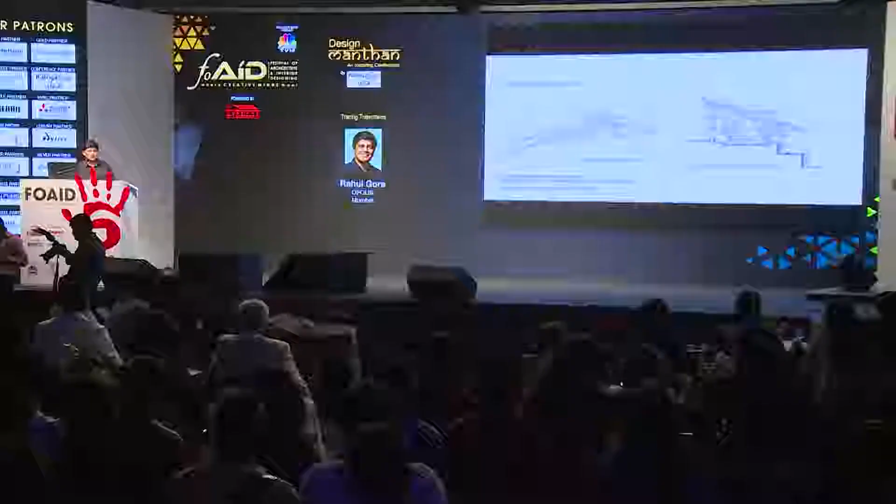So through the process of drawing, and these were hand drawings, ink on tracing, I measured through 4 houses. I learned to look at architecture and tried to analyze a building as to why it made me feel in a certain way. Nari Gandhi had already passed away, so in a way it was just his architecture talking to me, and I think that's a very interesting way to study buildings, just through the medium of drawing, experiencing them, and trying to analyze and feel them.

But sometimes the exact opposite has happened. Again, in Europe in '93, I happened to visit Frank Gehry's Vitra Design Museum at Weil am Rhein, and it made me literally run out. I don't know why, but it was within minutes. I didn't feel comfortable in that space.

That feeling of - there was an exhibition on African chairs, maybe there was yellow tinted light coming in. But what it was, I mean, it's a very analytical way of looking, and certain spaces do make you feel some way. So I think we've looked at architecture critically in the past. I'm very concerned with what makes you react in a certain way.

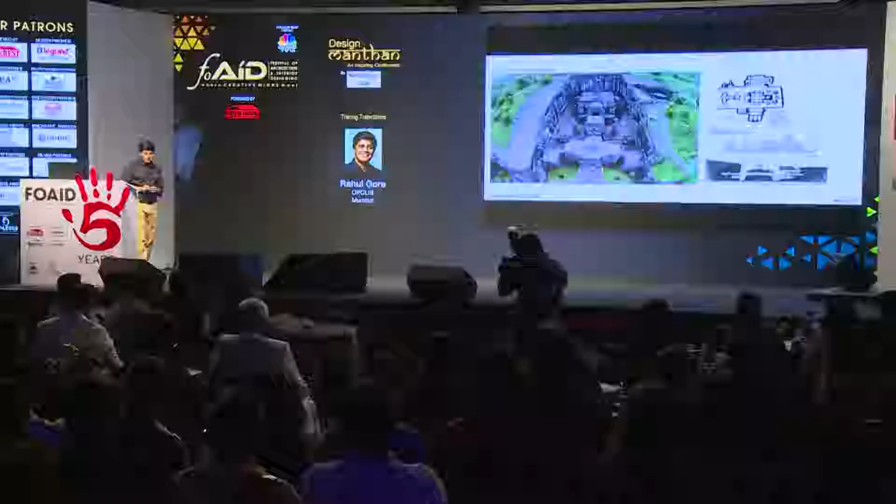I think historical places are always a super treat, especially one sees the way light and climate were treated by our predecessors. Or the sheer marvel of the Kailasha temple, to imagine that something from top down can be made into a positive architecture - to even think of a conception of having a form or a shape ready and start sculpting it downwards.

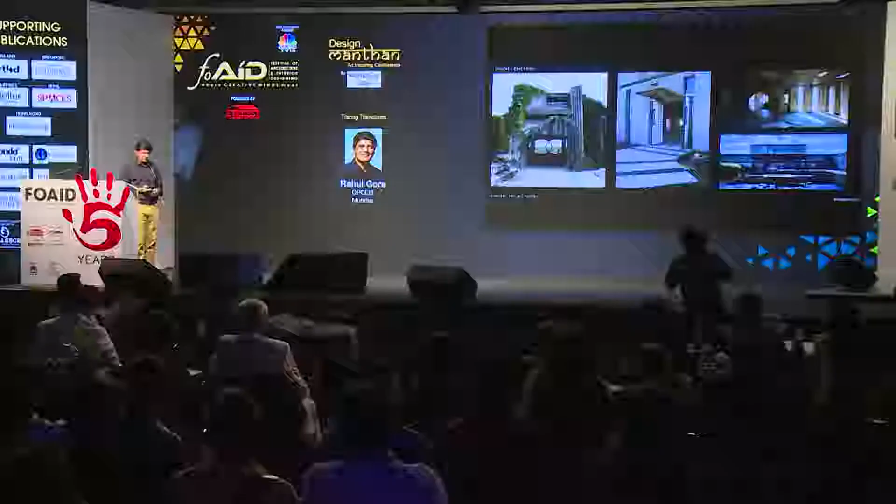Now, contemporary architecture buildings is also very important to look at, and we all have our heroes. The Brion Cemetery by Carlo Scarpa was simply mind-blowing for its kind of articulation of scale, geometry, texture, and right from the concept to the execution to the minutest detail.

Or La Tourette, where it's simply the creative genius of the man that was Le Corbusier. I think it's a building that really speaks, and you try and wonder what makes you feel that way.

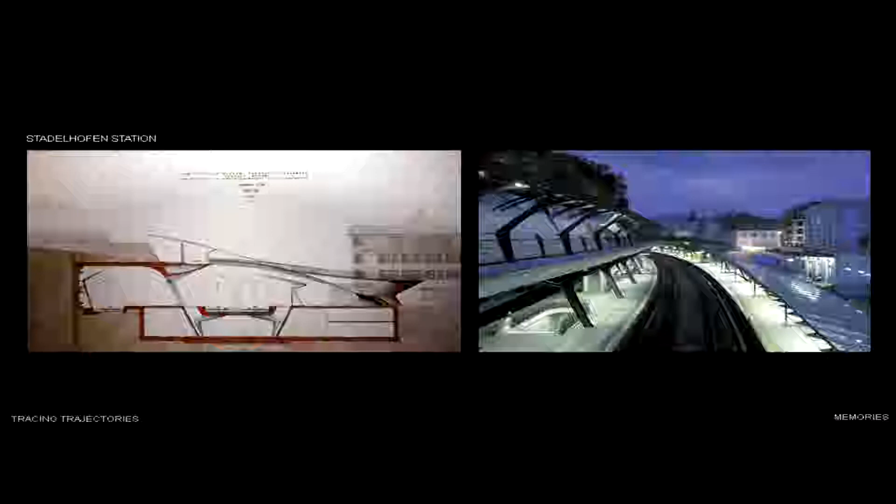At the urban scale, there is the Stadelhofen station by Calatrava, which very seamlessly integrates the urban fabric within the city. You don't know where the street begins, where the station ends - it's kind of woven one into the other, with very old architecture and new architecture marrying each other very well.

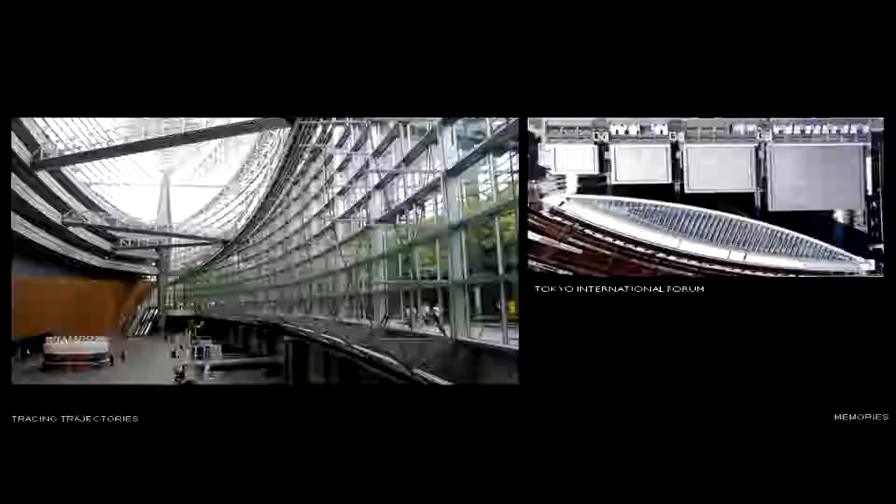The Tokyo International Forum by Viñoly in Tokyo, again a very complex program, large program, but integrating it seamlessly into urban spaces within the city fabric.

These are exciting projects. Or a very simple building, amongst my favorites, is a simple pavilion by Yoshio Taniguchi, where the only program is to go there and view. There is an awesome view of the sea and a park on one side, and this building essentially becomes a bridge between the two. So I think it's amazing how a non-program building was made into an event.

Or for the simple materiality and quality of light that Maki's architecture in Nakatsu has explored.

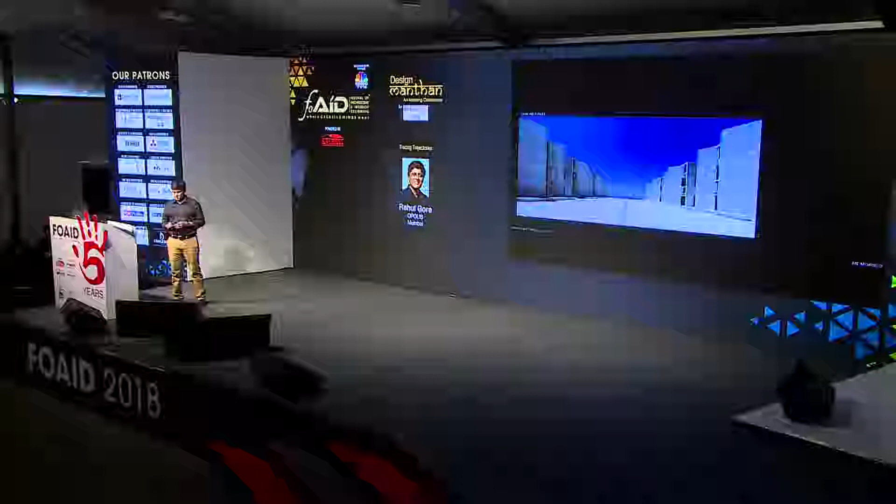Or the Salk Plaza, which I think has this timeless quality of space one can only dream and aspire to achieve. But on a recent visit, I also had a chance to stay at the India International Center in Delhi by Stein, and I think the proportions of this courtyard were brilliant.

So I think that study of spaces, right down every time we are visiting and experiencing it, it's very important to analyze, make a quick sketch, and see what makes you feel or why you like a certain thing.

So with this analytical mind and thoughts, Sonal, my partner and wife, we set up to do our studio, and we wanted to lay down certain guidelines that would help us navigate our future. So we laid down principles that were relevant to our studio and to our practice.

I don't expect you to read this, but essentially we want the studio to be a good place to work, learn, and grow, both for the people who work in the office and for ourselves. So that's the metaphor for the office as a family, and I think everybody can relate to what a family should offer. That's essentially how we like to see a studio.

So we get asked very often why we chose Opolis. I think the 'O' comes from our experiences in Japan, where 'O' is given as a sign of respect — they say cha is tea, but they'll always say ocha, or mizu is water, and it's always referred to as omizu. So 'polis' is city, and 'O' is for the respect. It's a practice about the city, and we also have an underscore to keep it open-ended.

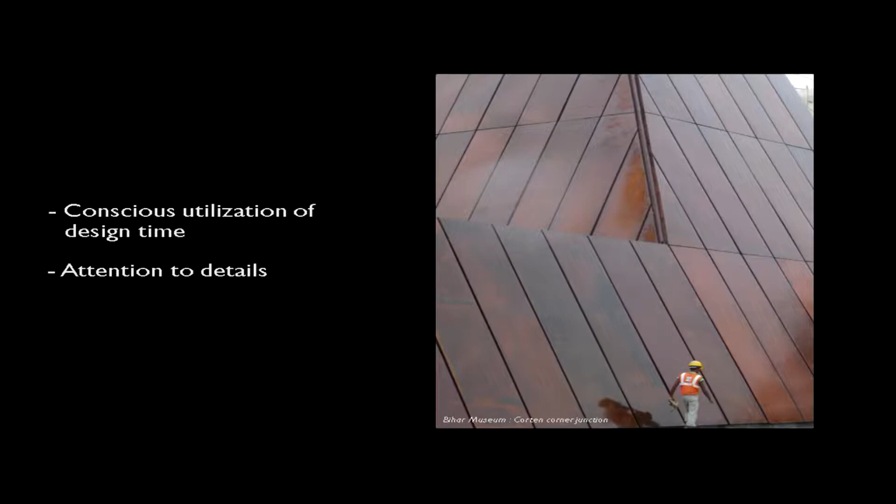But this going slow does not mean infinite time. In fact, we work very structured. What we ensure is to give attention to detail. It's similar to driving, what you observe when you're in a car, on a cycle rickshaw, or walking. The speed you move at helps you see different things. Similarly, the speed at which you design, especially in the initial design phase, is very important. So we set time, but make sure that time is well utilized.

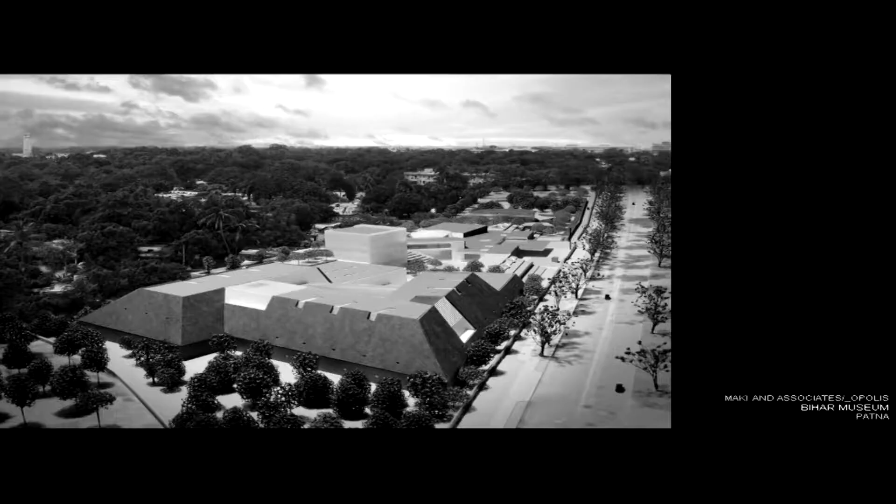With this, I'd like to look at the Bihar Museum project, which we won in an international competition along with Maki and Associates from Tokyo. The others were Norman Foster, Coop Himmelblau, Sanaa, and Libeskind, along with Indian partners participating in the competition. So this took me back.

I worked in Maki's office in 1998, and we had this opportunity to collaborate several years later. More importantly, the lead architects on the project were colleagues of mine. We used to sit together in the same room working. I had moved on to do my master's and set up my practice, while they continued working at Maki and Associates. So it was a wonderful collaboration to work together again 18 years later. I think that's very key, because in any collaboration, trust is the primary factor, and I think we've succeeded in completing this project primarily due to that.

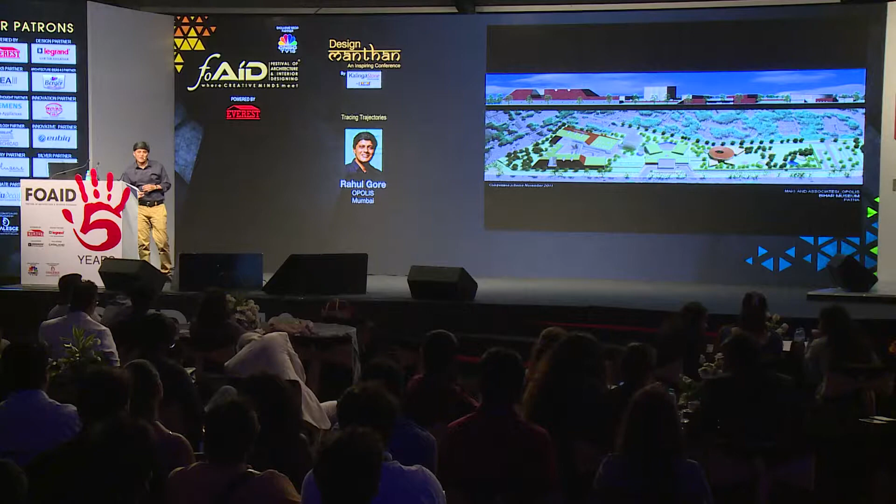So that's the Bihar Museum sitting in Patna city with the Ganges River behind. It sits on a 13.5-acre plot, with 250,000 square feet of built-up area. The building is 300 meters long, and the site was half a kilometer long.

I think the important part here was Maki's idea of collective form, which he's been exploring for the last 25 years, especially in the district of Daikanyama in Tokyo. I see this project as a continuation of that idea, where we looked at a collection of buildings, not an iconic building, to make it really integral to the city of Patna. So at the urban design level it was very important. But you have to tie all these buildings together, and that's where the material aspect came in. We used corten steel as a symbolic material, not only because it represents the rich past Bihar had in metallurgy, but also because it helped unify all the buildings along the street side.

The widest part of the site was there, and that's where the maximum program was fitted in. The entrance was kept away from the two main nodes, with the children's gallery on one side and parking beyond.

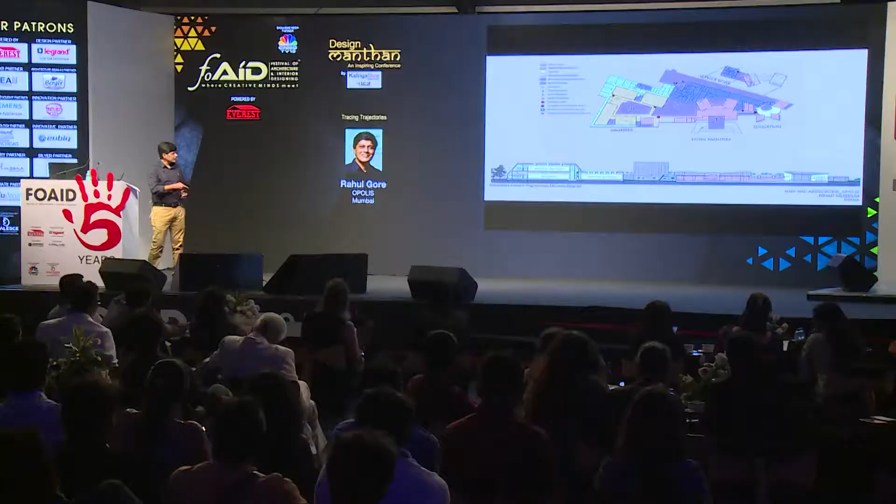It's largely a ground-plus-one structure, with only the administration tower rising to 4 stories. The galleries were on one side, and there was the entrance area, which was more bi-directional, taking people in and receiving and dispersing them. The Children's Museum on the right-hand side was more extroverted, connecting to the landscape. In section, you'll see it's mainly a ground-plus-one structure, with only the admin tower having 4 floors; otherwise it's primarily a completely ground floor structure.

The entrance is quite symmetric, in the nature of an entrance. It needs to receive people, calm them down, be at a correct scale, and let people disperse wherever they want to go. They need some information before they can move around.

This was the entrance area, the canopy, which was around 25 meters by 25 meters. It had enough space, with an idea of a group entrance where children and people coming in larger buses could get off and queue up a little if needed. There was a covered walkway letting people queue up if they came in a big group, and this was the main entrance to the museum.

And then, so the large crowds—sorry, I'm getting ahead of myself.

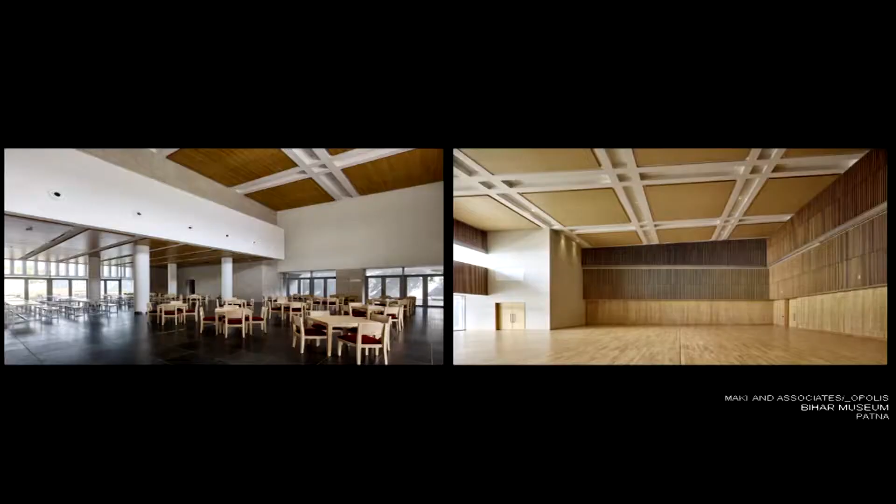Oops, this monitor and that monitor are showing different, huh? Yeah, now they're showing okay.

Sorry, so for large crowds, I think the scale of these reception areas is very important. There are sometimes small groups coming in. On a weekday, there are hardly 10 or 15 people hanging around, but on a weekend, suddenly there are thousands of people coming. So how does one design these lobbies to be sensitive to both scales, without people feeling either too crowded or too alone in that space? Those were important aspects.

These are the two large span spaces that are on either side of the reception lobby, with a cafe on one side and the multi-purpose hall. These are like 25 meters by 25 meter spaces again.

This is a view of the main reception, then looking towards the right, towards the children's gallery, where one moves ahead and sees a courtyard with terracotta, a new material introduced primarily to give the children a special character.

Then the children's museum itself is this large drum. This is the exhibition designed by Lord Cultural Resources, not by us, but these were actually replicas, and you could touch and feel them. So the kids had a lot of interactive display spaces.

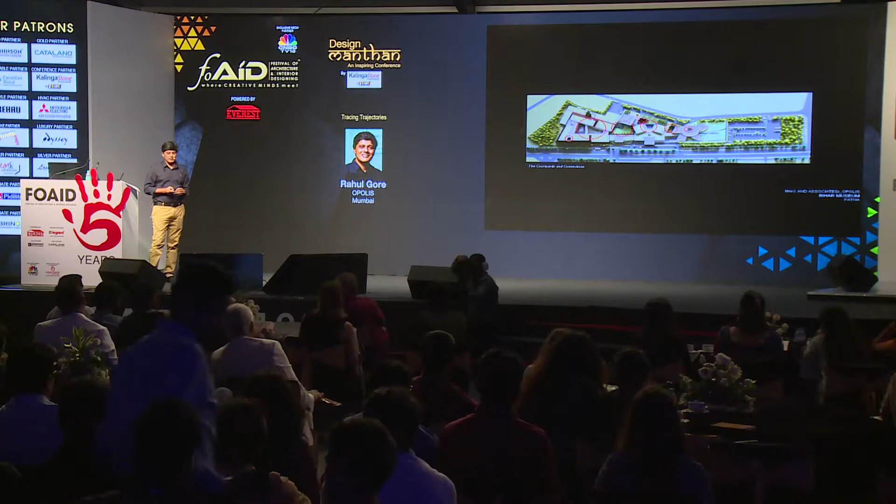What's unique in this building, I think, is it's got 7 courtyards, and I already showed you 2 which were in the children's gallery. There are 5 other courtyards, all of varying scales and materials, each having a particular function.

This one's the cafeteria courtyard, and it has an amphitheater. The administration tower overlooks the courtyard.

Or the exhibition courtyard, which is completely white—it has white gravel. It's meant for exhibitions, but more importantly, for sound quality, because Patna is a very noisy city. We've used the building masses here, the scale, to make the space really quiet, ideal for exhibitions.

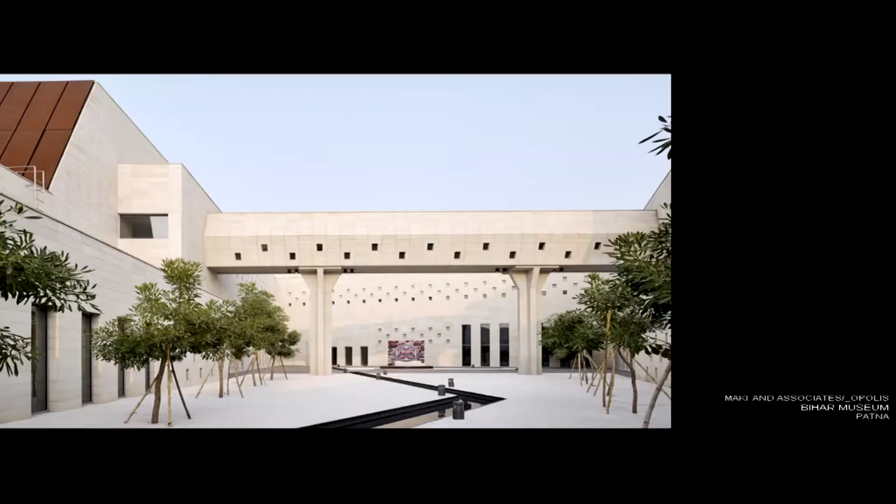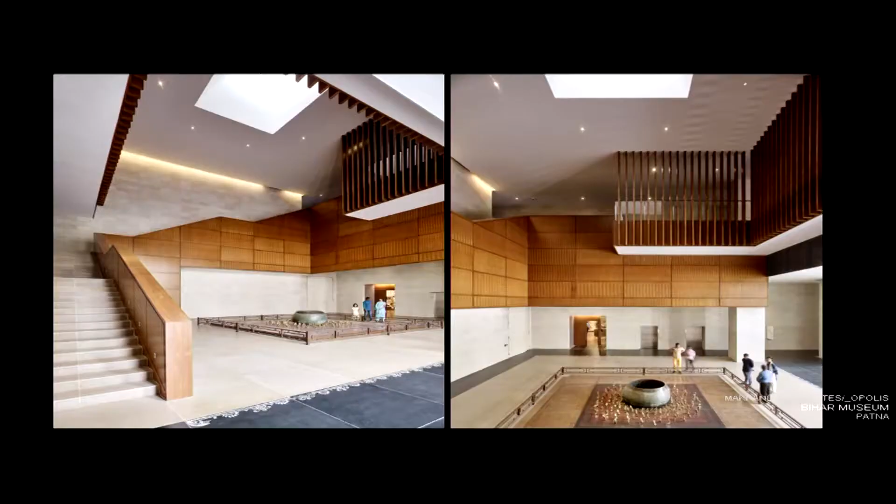There's another view of that same space, and you see a bridge that connects the exhibition sequence at the first floor level. Within this exhibition sequence, you have a lounge space where we've introduced the material teak. It's a triple volume space with a skylight where one can move up the staircase, but it also creates a pause—it has washrooms and other areas where one can relax.

So the galleries themselves are these black boxes, large spaces spanning 20 meters by 60 meters—some of them are 20 by 80. And as you're moving through these, I think you lose sense of time.

So what we've done consciously is create these cloisters with a lot of natural light coming in, and daylight becomes a good reference at every point, to make sure one is not disoriented when moving through these black boxes. These are the cloisters, the passages at the upper level, with the image on the right showing the bridge.

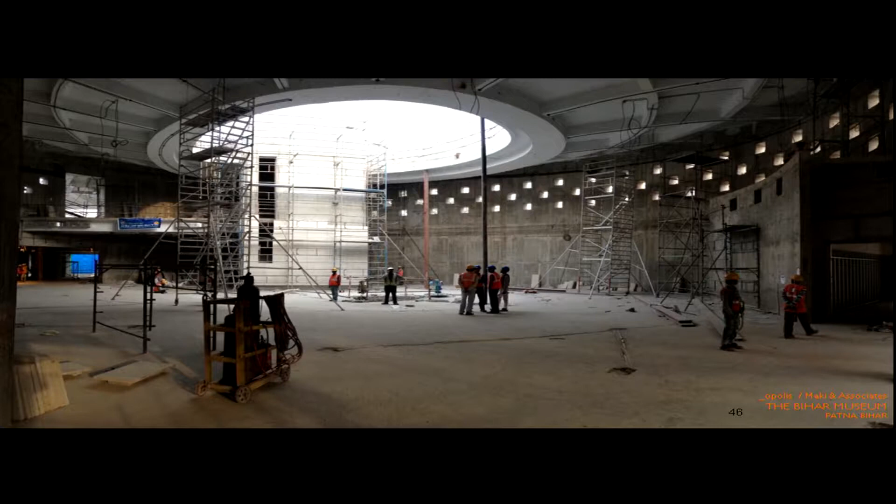But I think the most exciting part of this was seeing the construction activity. This is a 35-meter large span space designed by Mahendra Raj as a structural consultant. It's basically got 600mm thick RCC walls with a concrete ceiling, a slab with an elliptical cutout in the center—so it's columnless and it's 35 meters.

I think during the process of construction, that was, for us as a younger practice, a great learning experience. We had 4 people from our office based in Patna reporting directly to me in Bombay and to our team in Tokyo. So a lot of our personal time, including mine, almost a week every month for 3.5 years in Patna. And it's not an easy city to live in, so that was the real challenge—keeping people motivated and happy in Patna.

So from here I'll just change scales and look at a house that was happening almost in parallel with the museum. This is just 1,600 square feet of built up area, located in Khandala. What's unique about Khandala is that it sits on top of the Western Ghats, and that's Mumbai there.

The entire rain is kind of deposited there. The first onslaught of the southwest monsoon is taken by Khandala. If a house is not built well with a good roof, it definitely leaks. I've not seen a single house in Khandala which does not leak.

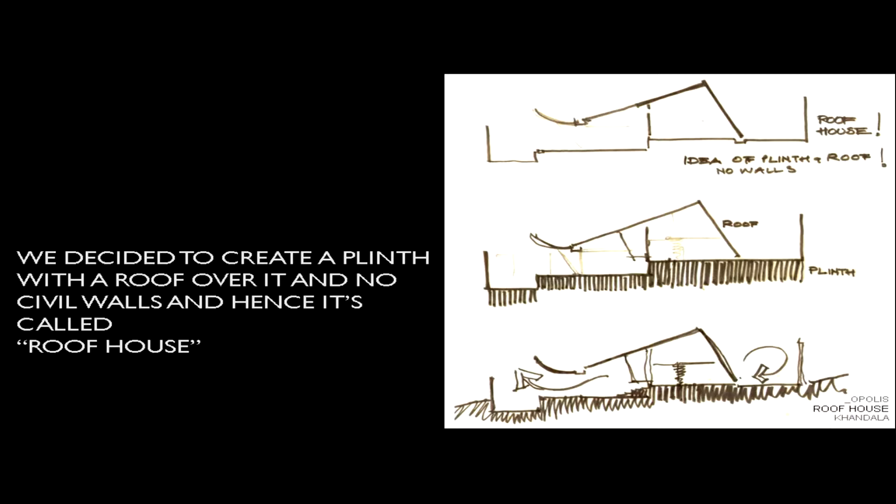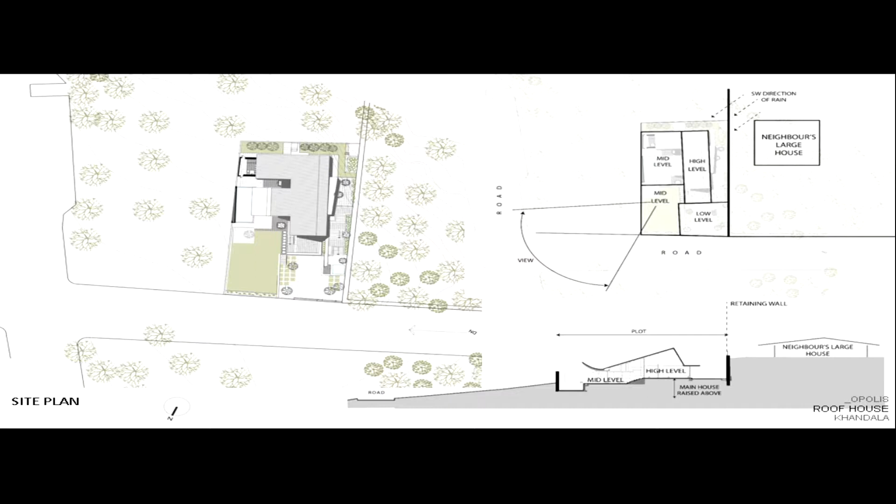So I think that was at the back of our mind, and we decided to try and do a house where the plot was quite small, just 10,000 square feet. So we did a house with just plinths and a roof, and said let's not have any walls, because if rain comes at an angle, walls start leaking as well. This is the plan where the rain direction is seen in the southwest direction, and there was a roof that leaned into the rain and took the main onslaught of the monsoon.

This place was for a very young family, a young couple with young kids, and using the natural levels of the site to make it as playful as possible was the key concern. So there's an outdoor living room which is basically open, with movable furniture on wheels that can be carted away and put inside a plinth, so that the house is only 1,600 square feet. This is one of those examples of building less.

Because of the rain, we had to deal with how it drained off the site, and we decided to make that into some kind of an element. This is a view. The image on the right shows how the roof itself became the wall, and on the left it shows how the roof made space, but because of the levels, one could open up a little bit on that side.

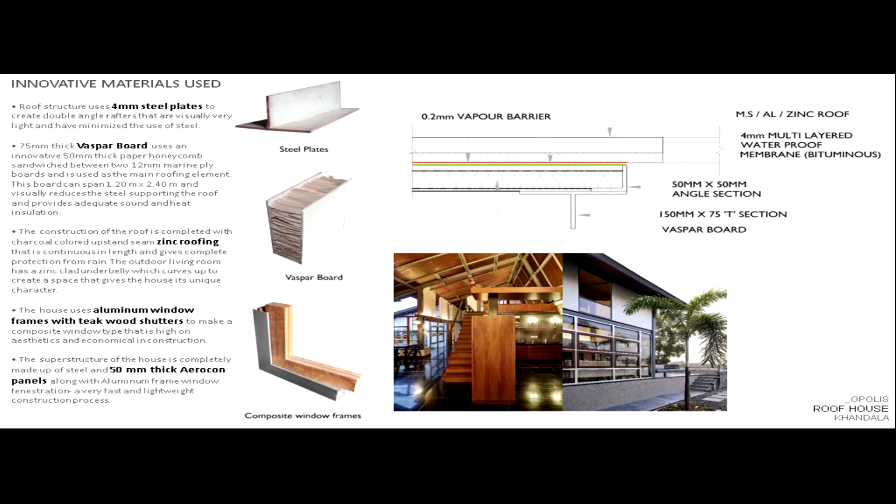I think the key innovations we looked at in this project, there were several, one was to use 4mm steel plates to build up a section instead of standard sections. This lets steel be used as steel, designing the member around that 4mm thickness so it can be used very economically. Huge credit goes to Manjunath, the structural consultant on this.

Another material we explored was the Vaspar board, using a 50mm paper core with marine plywood laminated on both sides. This allows the roof sheeting to span larger areas. Typically you have rafters every 2 or 3 feet maximum, but here we could go up to 8 feet by 4 feet without a support in between. I think that was a great innovation.

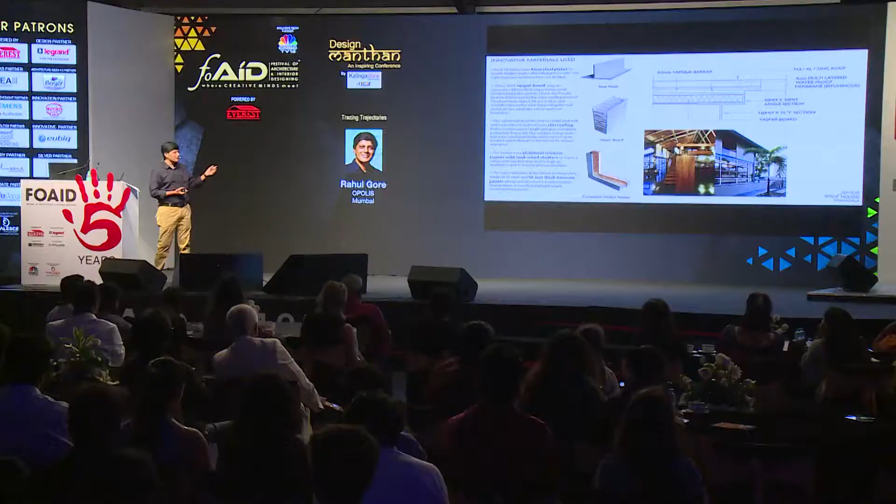Thirdly, to reduce costs, we used an aluminum frame for the window, but the shutters were still made of wood. So you got the look and pleasure of wood at a fraction of the cost, since the frame takes the maximum wood, at 6 inches by 3 inches. That was another innovation, and that's how it came together in that space.

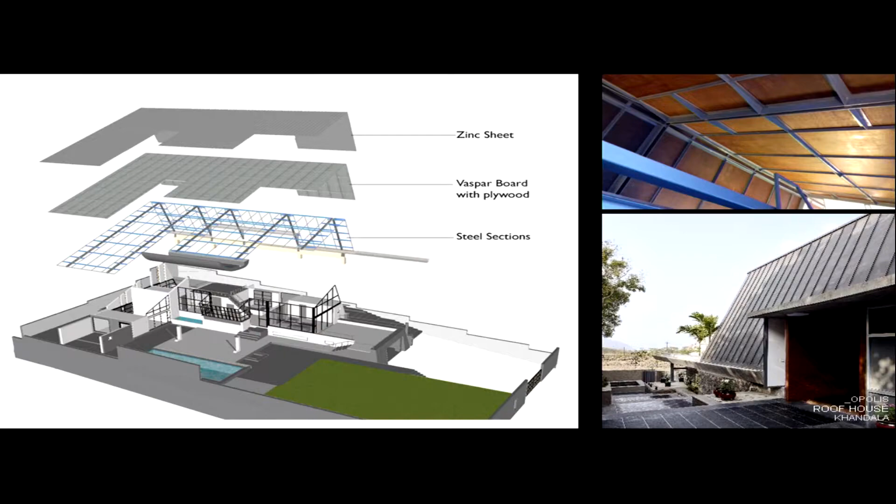The axonometric shows the zinc roof on top, the Vaspar board, then the steel structure, and then all the levels and plinths. The house is essentially just a set of plinths.

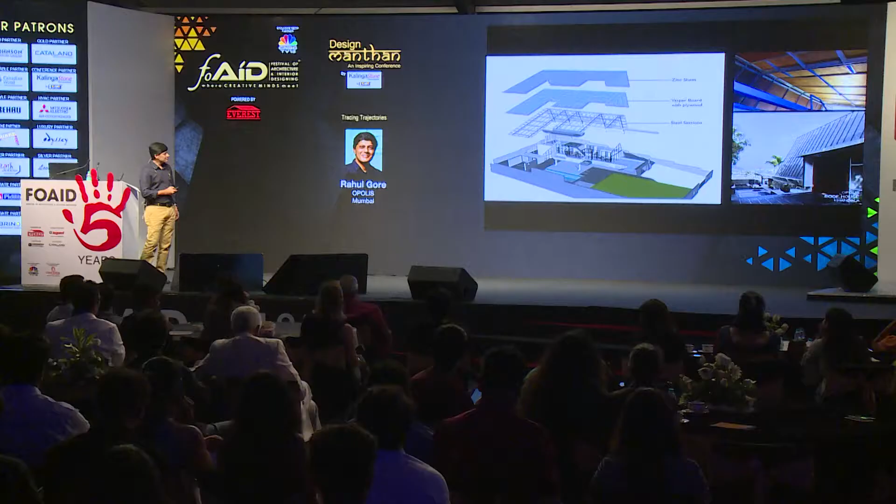We learn a lot from our clients, we learn from our teachers, and there's one statement that sticks out: first agree and then disagree. There was a client who used to always tell us, you guys are young architects, you don't want to listen to us, you're always fidgety, you just want to put your viewpoint across. I think that was a very important thing, because you learn to listen and then give your viewpoint, but it also breaks a barrier.

You break that ego barrier between the architect and the client. Because if a client comes enthusiastically with an idea and you kind of rubbish it off, his ego is broken and hurt, and then he's going to quell any idea you want to go ahead with. For this project, this client had taught me this, so we decided to use it on him.

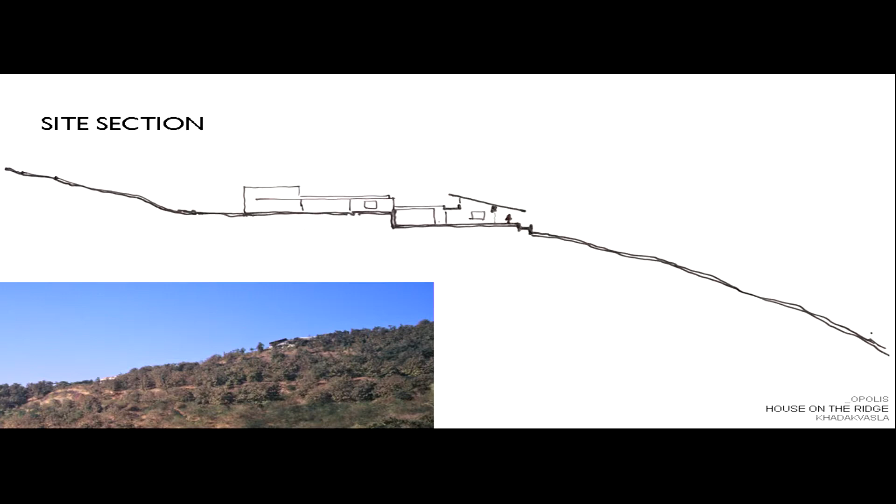It was an interesting thing, because the project sat on a ridge, and the views from there were fantastic. You can imagine that's the house, and the views from there were fantastic. It was coming up, we had finished the plinth and the roof structure had started coming up.

The client says, man, this view is unbelievable, but let's go and make a terrace there, we really want the view to be even better from up there. So I had to, at that stage, say, okay, yeah, great idea.

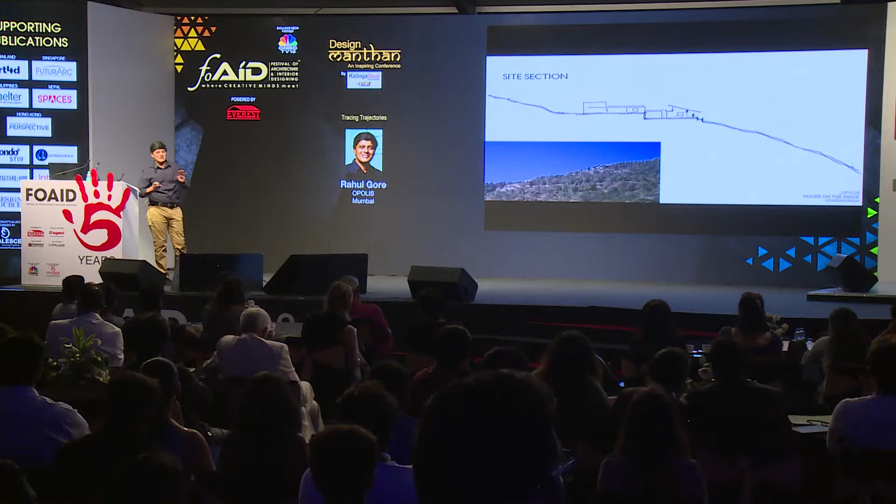I had to explain to him that imagine you're just a speck in that section, and if you are 3 meters up or 3 meters below, your view is not changing dramatically. I think things like this really helped us understand. So we used it on him, and he readily agreed, but I had to say it's a great idea. If I would have said no at that point, I'm sure there would have been a flat roof over this.

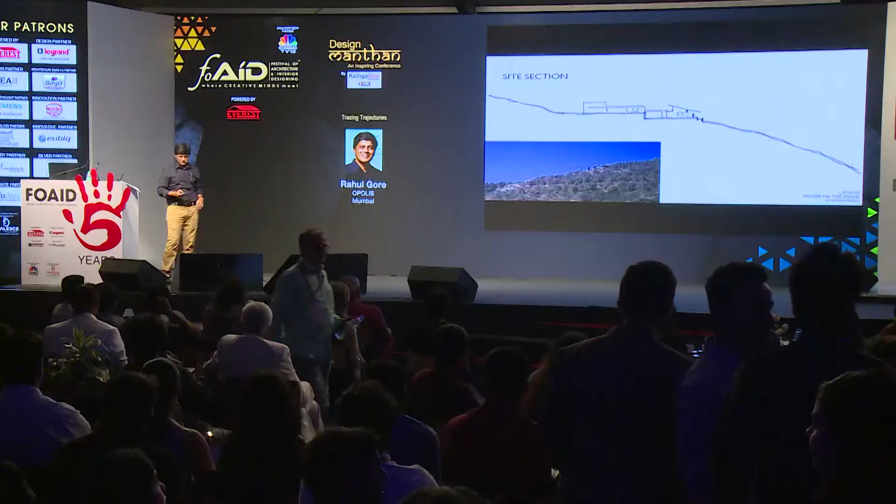Another very important thing is to ask this question: is it necessary? We had a professor, Shimizu, who Sonal and I are very influenced by. More than anything else, he always said life should be simple, it's about simplicity. For him, 'is it necessary' was more about personal belongings, but when you apply it to design, at every stage we really ask ourselves, is something necessary? And if the answer is yes, you ask yourself again, is it really necessary? And if your answer is still yes, then the design needs it. That stripping down process is very good. But simplicity should not be confused with being simplistic, because the latter has negative connotations, where one does not understand the complexities of a situation. Simplicity is a state of mind, a state of being, and to achieve that simplicity is very important.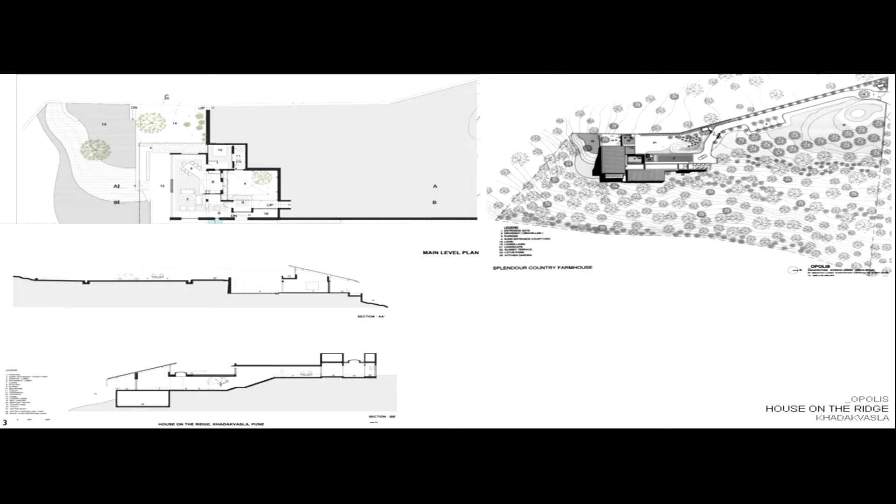So that's this house that sits on a ridge. It has a view in almost a 270-degree angle. You can see that here, and it hugs the slopes as it turns.

It's not going ahead, huh? Okay.

So you lose sight of the views when you come in, and then when you go down, the view explodes and you see it yourself.

I think kids with their inquisitiveness occupy space in the most interesting ways, and I think they've taught us a lot. You design for spaces, but it's eventually the end user who comes and changes the way it's used. If you learn to observe how they're using it, it helps us develop spaces much better.

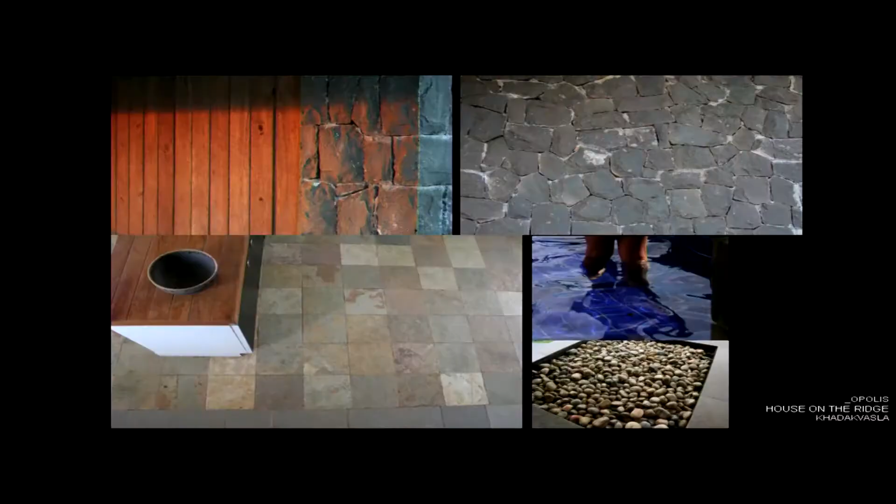Local materials—this house used completely local materials that came from the site. The stone was from the site itself, from the foundations.

There's again a difference in the feed. Huh? No, this one and this one are not the same. Yeah, no, this one needs to go one more. Can this one go ahead? One?

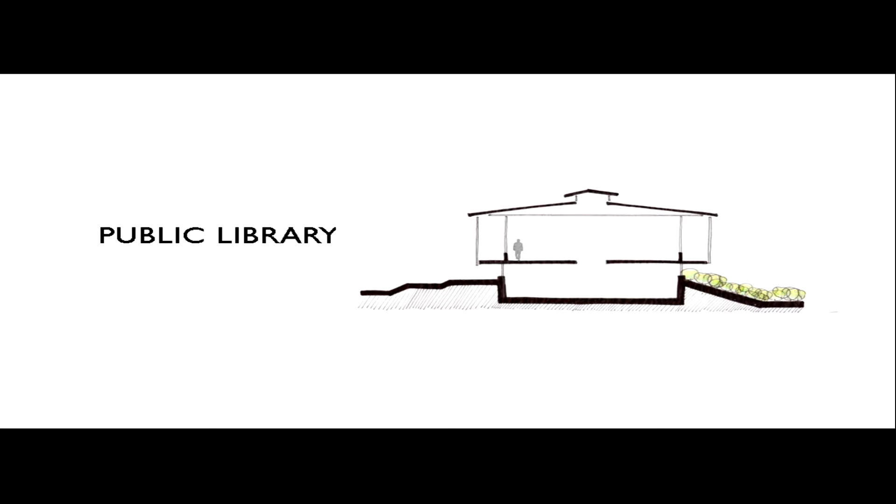So we got an opportunity to look at a library, a public space, a public library. It sits within a park. Our practice has consciously looked at socially relevant projects throughout—we've done Cross Maidan, Shivaji Park, Chowpatty in Mumbai as urban spaces. So here's an opportunity to look at a library space.

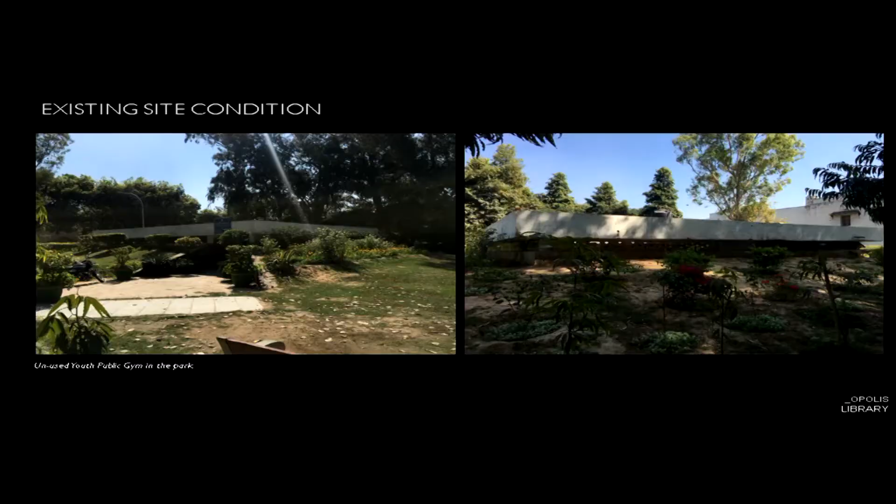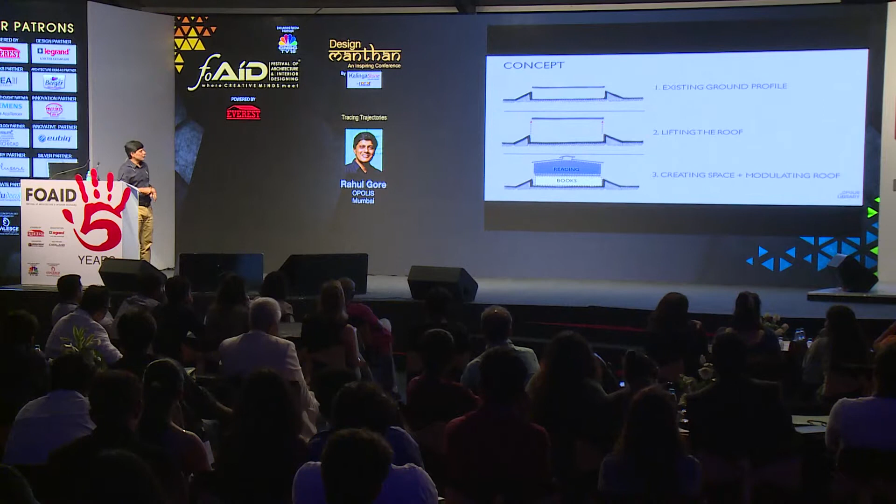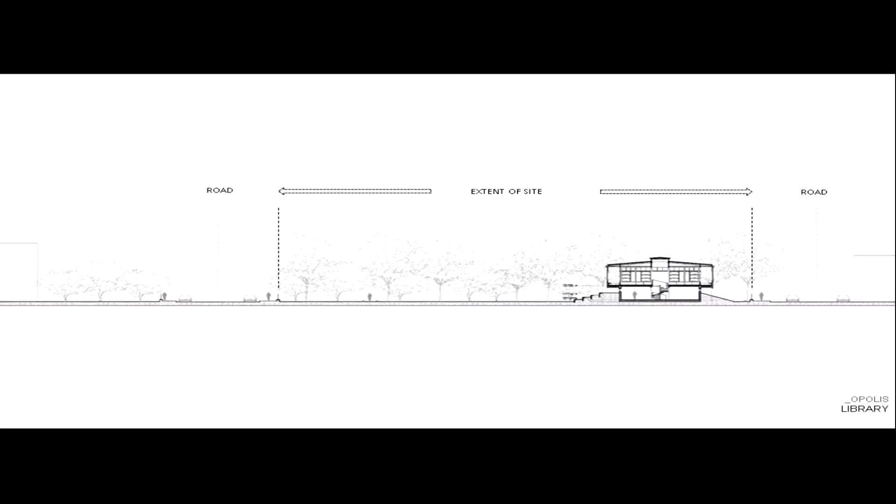There's an existing gymnasium, and they want to make a library out of it. The surroundings were beautiful, so we thought, let's use the existing ground profile, lift the roof, and create two zones—one for reading books and one for storing them. So we freed up the boundaries, created a lockable space, and treated the veranda spaces as a buffer that can look out into the landscape. That's how it sits between two streets, within a lovely, fully grown park.

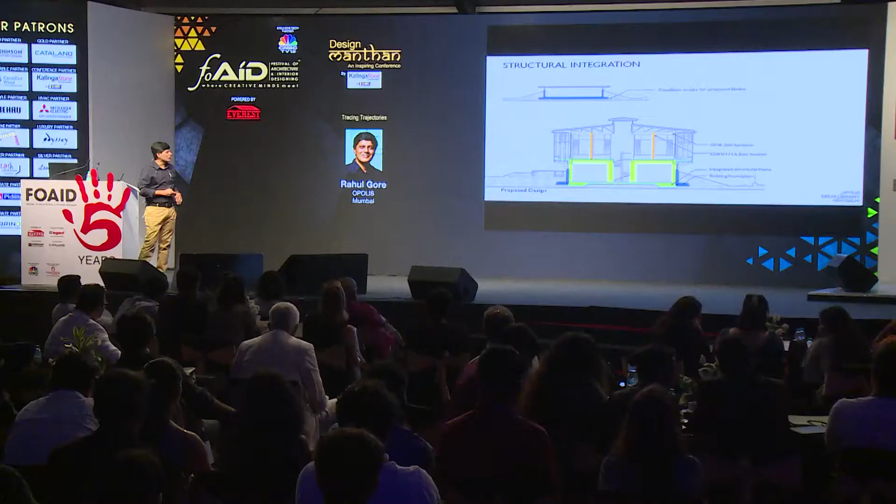We had to retain the existing foundations of the building so there's no damage outside the footprint that was already identified. So we built concrete walls within it, built up a plinth, and then took up a steel structure from there onwards. That's how it will hopefully come up—it's under process, let's see how that turns out.

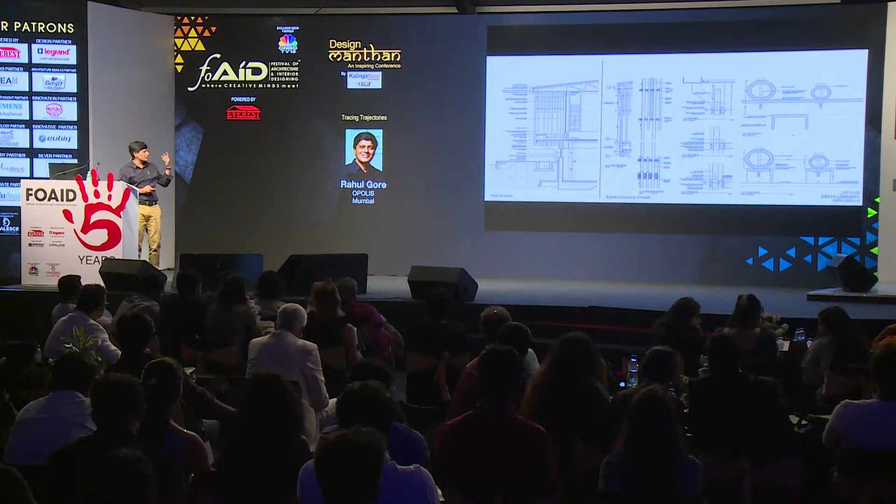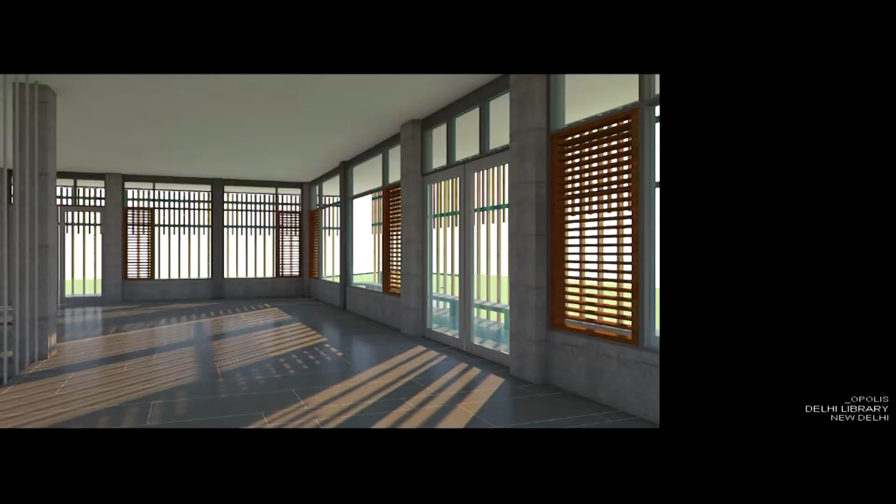We used a screen of bamboo, articulated and detailed it, to make a space that becomes a buffer zone between the library's interior and the exterior space. That's another view, and the landscape terraces out where one can do book readings and have social spaces around that. That's a view from the inside.

Another very important learning: in any project we always compromise, and clients make our life difficult, but it's important not to give up on that one idea that holds the project together. There's nothing called perfect architecture, the perfect client, or the perfect site—you've got to negotiate your way through. But as long as that one idea doesn't get compromised, it's always worth doing the project, because you spend 9 months, 10 months on it.

To walk out of a project is very easy, but to negotiate it and not let go of it till that one idea is really compromised - if that happens, it's not worth it, you have to leave the project. That's something we've kept at the back of our mind throughout, and that's helped us build a lot, making sure we don't compromise on our principles, but at the same time, if it helps get something built, I think it's always worth it.

There's always a conflict between the heart and the mind, and this applies to a lot of things, but I think it also applies to design, because sometimes the logic says something else. If you go with your heart, you never regret it. Anything else you follow, it'll always say, it should have been done, I should have followed that. But if you go with your heart, even if you go wrong, you don't regret it.

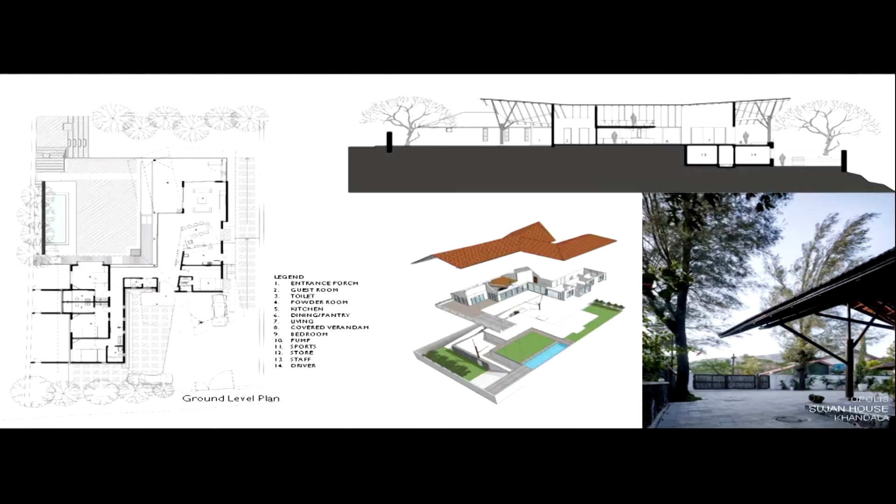There's another house we've done in Khandala, again a similar kind of rainfall, again using the roofs, a small plot. A young family with kids - the idea was to create a space for them to play around, using as much of the plot as possible.

I think my time's up. I'm just going to run through this last project.

This is a showroom we've done in Ahmedabad for a brand, Sternhagen, who had this tagline, 'Art meets engineering.' I have my friend in Switzerland - we share a friendship that goes back to when I was there as an exchange student, and he was interested in collaborating with us on this project. So we developed a concept of having these pods that were the destinations, with a journey through which you went, and to have art within that. We called it Art Meets Engineering - there was a journey, with art that was part of the journey, and then there were destinations, the ends, where the product itself would be displayed.

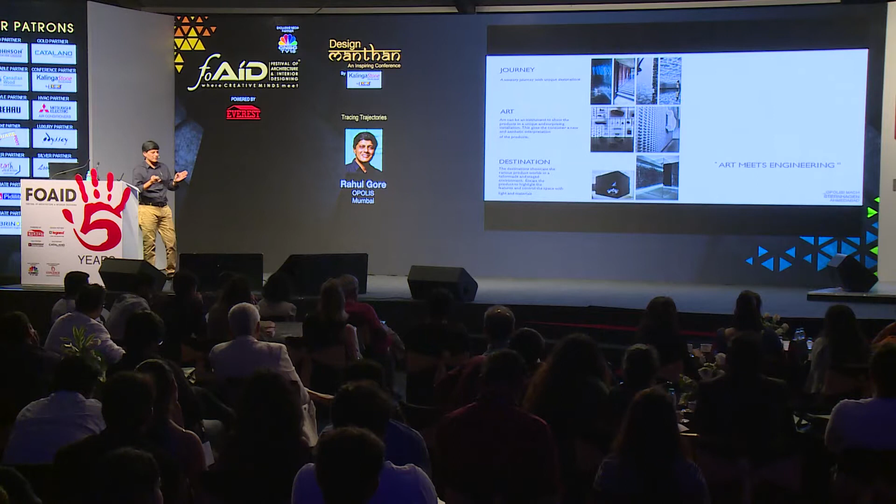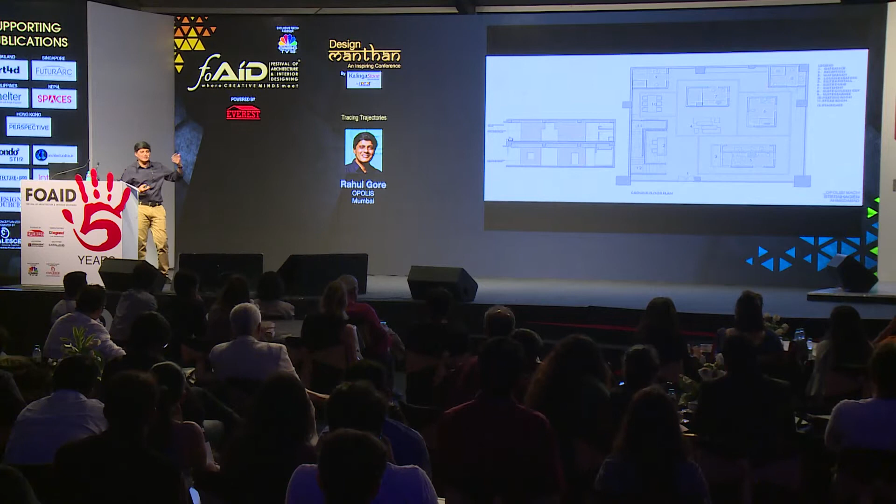So that's how it looks from the outside. One important aspect was, they had 2 floors, and how does one make - so we had these kind of cubes within the space when they actually punctured through the slab and came up. That's how we were trying to visually relate the two, so that the person - he had to put 2 brands in there at the same time to show that it's like one project.

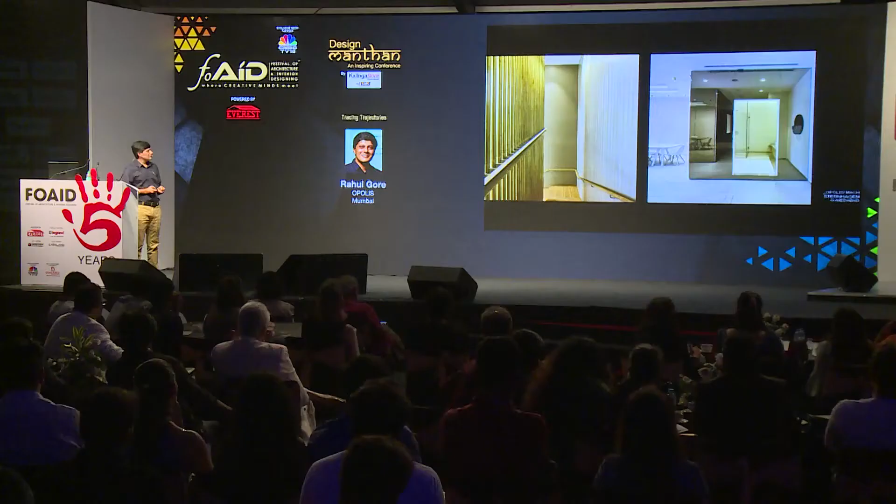So the shell uses very raw materials, which is part of the journey, and that has art installations. At the same time, the destination, the cubes itself, are very finished using reflective glass mirrors and high-end materials. The way it was detailed out was very intense - we used materials like brass and mirrors.

I'd like to say that you can't connect the dots looking forward, you only connect them looking backwards - that's Steve Jobs' famous statement. The year was 2000 when Doshi visited us in LA, and we had the privilege of hosting him, which was wonderful, because he always made it a point to come and stay with the students. We had an opportunity to drive with him and see Salk Institute. You can imagine how excited we were, but what was more interesting was to see how excited Doshi was to see Salk Institute, and I think that really rubbed off onto us.

So our collaboration on the Bihar Museum and the Mumbai Museum is this thing of looking back. You can only say, going back, that wow, I worked in Maki's office and we ended up doing a building with him. So there's nothing - you have to live in the moment. At that time, one can never say what's happening. There's another statement that nothing in life is by chance, but you have to make choices and work towards them. I think that's precisely what we've done.

Doshi had told us this - just do your best, and things will fall in place. It's similar to a river or driving on a freeway, where opportunities come, obstacles come, you learn to push them aside, you navigate through them, and it always throws up new opportunities. So that's the way we've approached our practice, and we've looked constantly at working in the present and doing our best.